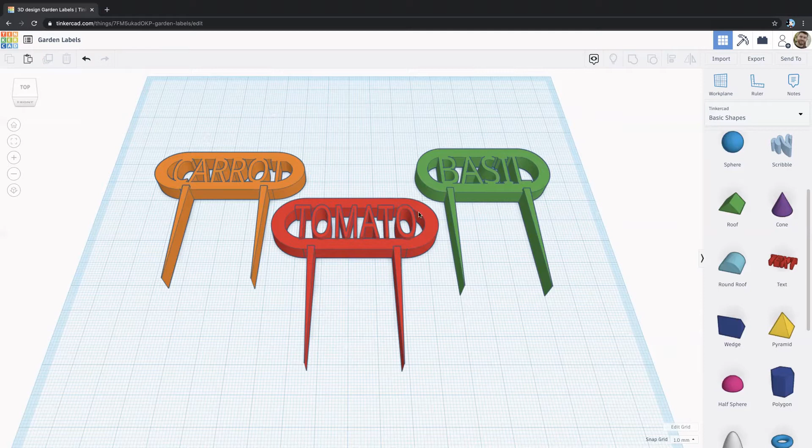To get started, we're first going to make this ring shape, which consists of two curved end pieces connected by two rod shapes. I'm going to walk you through step by step on how to make these, and when we're done, I'll show you two more very basic garden label designs you can make if this was too advanced. Feel free to pause this video and go at your own pace, but I'm just going to go step by step through my process.

Okay, so I'm going to clear my workspace to get started.

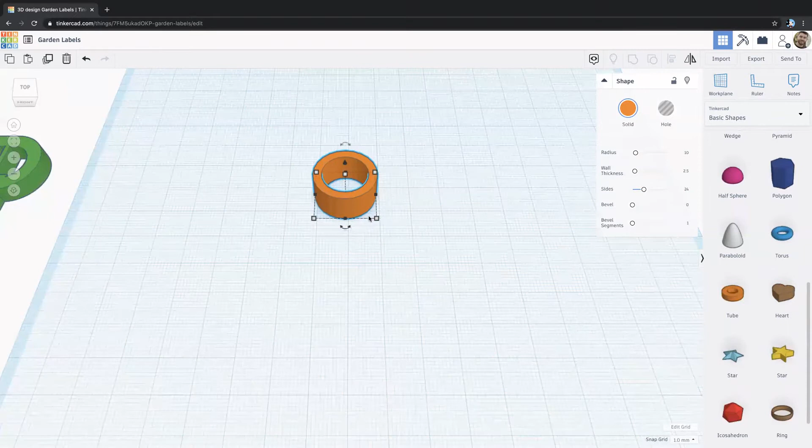We're going to start by going under basic shapes on the right hand side, scroll down and find the tube shape, and drag it into the work plane. Now I'm going to make this a little bit bigger by clicking one of the white boxes in the corners, and if I hold down the Shift key, it will keep the same dimensions, so it'll stay a circle.

I'm going to make it a little bit bigger. Let's say I'm going to make it 35 by 35.

I want to make the wall, which is how thick the circle is, a little bit thicker. I'll go to wall thickness on the right and set that to 4, see what that looks like. All right, that's a little too thick. Let's move it down to 3.5. That looks pretty good. Maybe 3. All right, perfect.

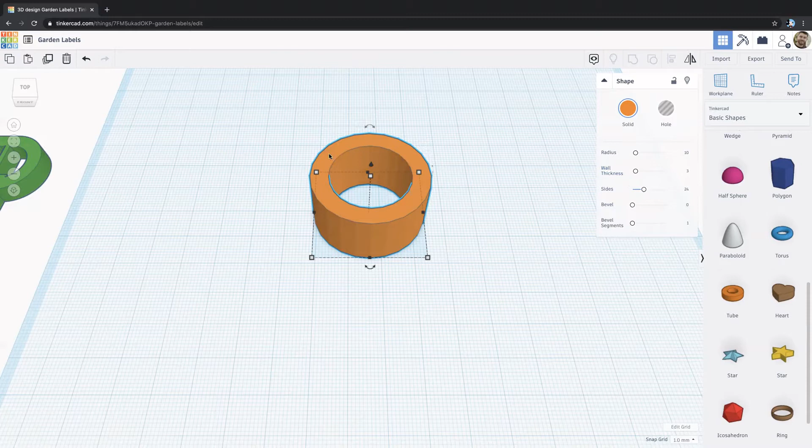Now the side slider will be how smooth the ring is. If I zoom in, you can see the circle is composed of a bunch of different flat shapes. If I increase the sides, you can see my circle gets a little smoother. So I'm going to increase that to 50 sides so it looks a bit smoother.

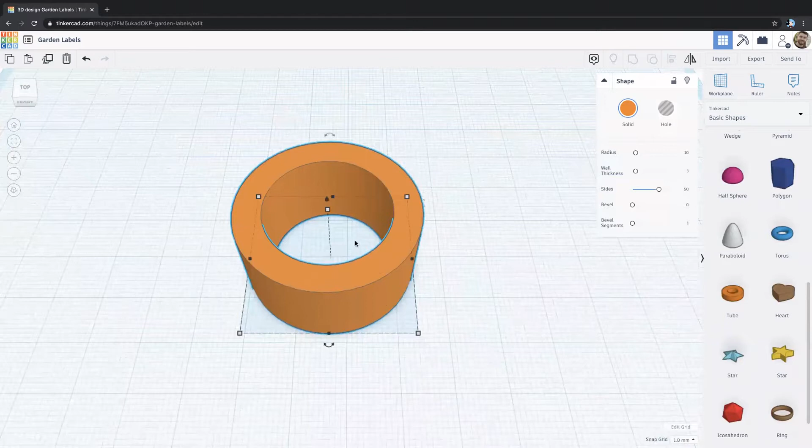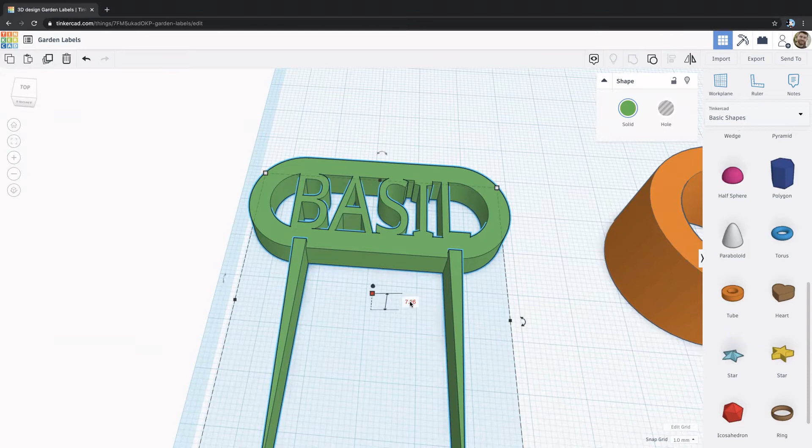Now I want to set the height of my label to be a little bit smaller so it prints and won't be so bulky. If I click on this object, I can find out the height by clicking the white dot in the center. If I click that, I can see this one's about 7.26 millimeters high. So I'll make it a nice even 6 millimeters high.

I'm going to go to my orange object, click that center dot, and change that to 6. Perfect, 6 millimeters.

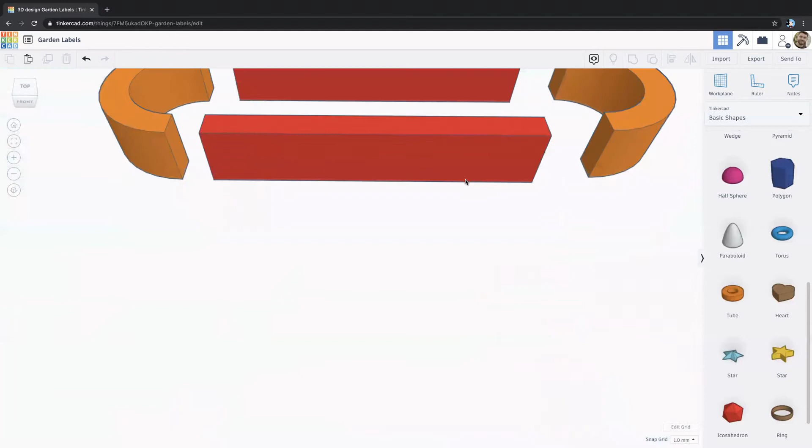So I'm going to take this one tube object and slice it in half. That way I'll have my two corners here and here, and I'll know they are the same dimensions because I'm taking them from the same circle object. So how do I do that? Well, we're going to use a hole to cut this perfectly in half.

I'll click this again—you know the dimensions because I showed them before, but if you forget, you can highlight over the corners and it'll tell you the exact dimensions. I set it to 35 by 35, but I'm going to make it an even number so it'll be easier to cut in half. I'm going to click the corner, let's make it 36 by 36. I'll use the tab key to go to the other side, 36, hit enter. All right, perfect.

So if I want to cut this in half, I need to make a hole that is half of 36 wide, so 18 wide. I'm going to drag a regular box icon from the basic shapes on the right, and set it to 18 millimeters in width. The height shouldn't really matter as long as it's taller than this circle, so you can just eyeball it.

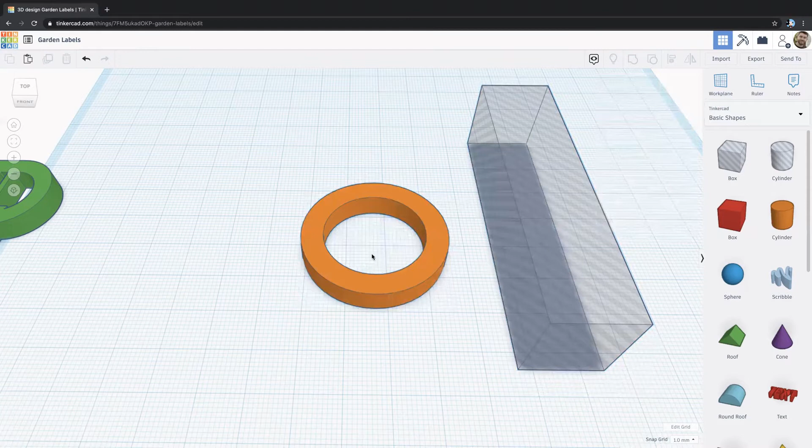Now, because the width is half of the circle, I need to align them so the side of the hole is lined up with the side of the circle. So I'm going to select both the circle and the hole. You can click one, hold shift and click a second to select them both, or you can just drag a box around them both to select them.

I'm going to click the align tool on the top right. You can also access it by hitting the L key, but if you don't want to do that, it's right up on the top right. It looks like two boxes with a vertical line. I'm going to click that, and all my little dots change to these black circles.

So it's asking me how I want them aligned. I'm going to click this circle here at the bottom right, and that's going to align them on this right side of their objects. Now you can see just with the naked eye that this looks like it's been cut right in half, and we know it's been cut in half because this box is half the width of the circle.

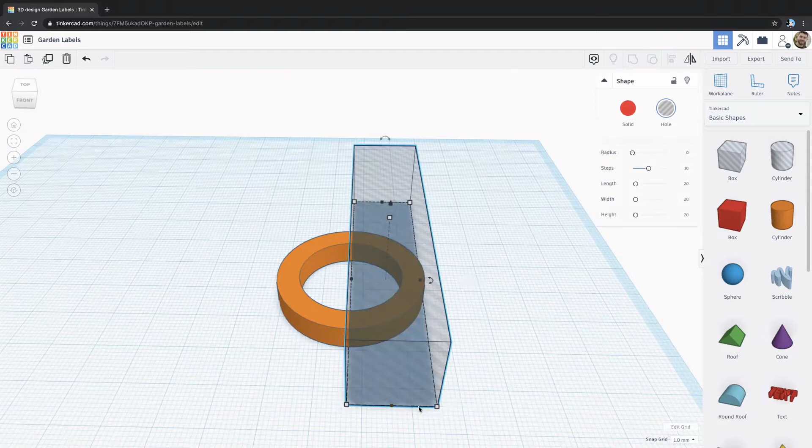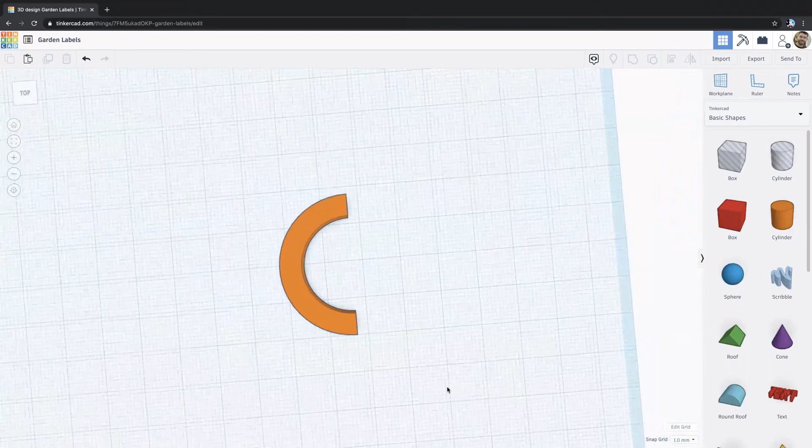Now what I'm going to do is group the hole with the solid object to cut it in half. So again, I'm going to select them both and click group on the top right. When I group a hole with a solid, it cuts the hole out of the solid, so now we have a semicircle right here. Perfect, so that's one end.

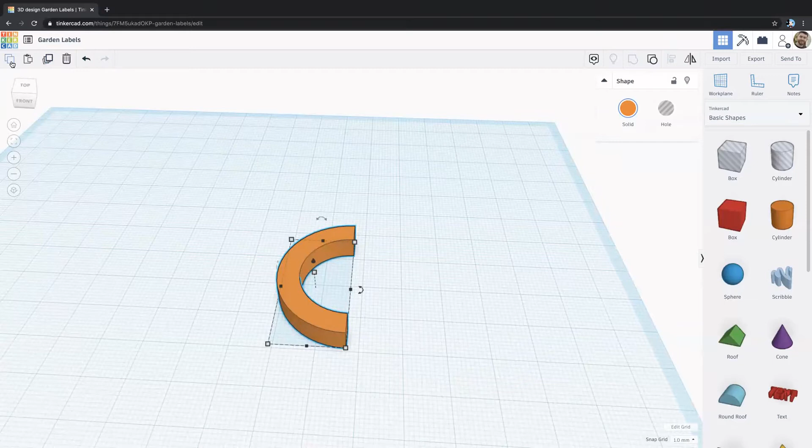Now, instead of going through all of that again, I'm just going to take this and copy it. I'm going to click the object, then do Command C and Command V, or Control C, Control V if you're using a PC, to copy and paste. If you don't want to use those shortcuts, you can use the icons on the top left, which do the same thing. So I'm going to select my object - the two stacked boxes are copy, and the clipboard is paste.

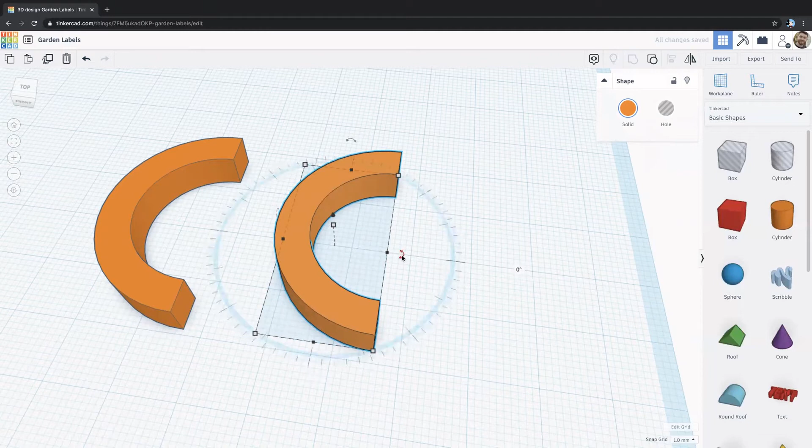Does the same thing. Now I just need to rotate this. You can see there's a few arrow icons - just make sure you're clicking the right one so you're rotating it on the right axis. I'm going to click this one, and you can either click it and rotate it like that, or you can do it the same way we did before - enter it manually, enter 180 degrees to flip it around.

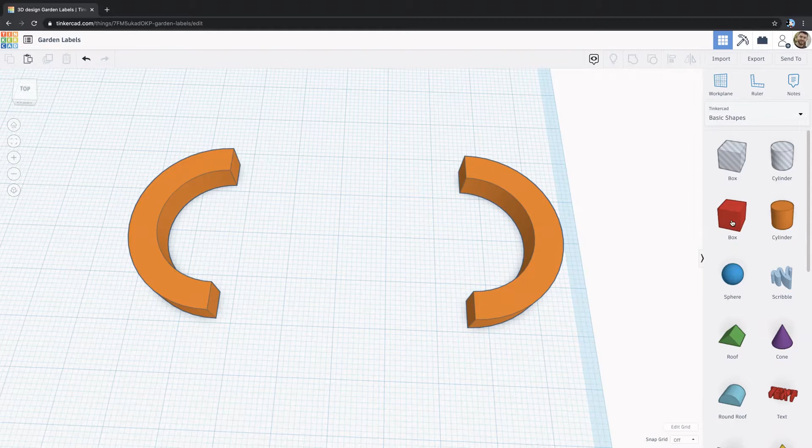All right, so now that we've created our two round edges, we're going to create the top and bottom little struts that will connect the two curved endpoints. We're going to do that by dragging out a box, and make sure we set the box's height to the same as the ends, which you can click that little box in the middle, and we set ours earlier to 6 millimeters. So we're going to change this to 6.

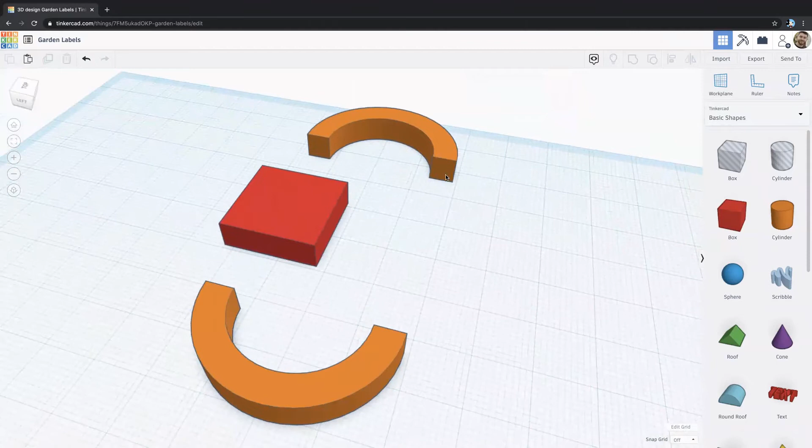Now, we don't know what the thickness of the endpoint is here. It won't be the same as the wall thickness that we set earlier. So what we're going to have to do is eyeball it.

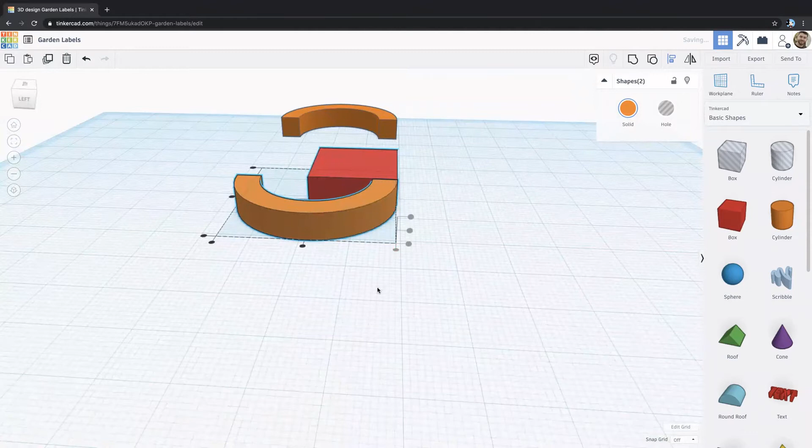What I'm going to do is select an end and the box, and align them. So click again the L key or the align tool on the top right. I'm going to make sure that they're perfectly flush, so I'm going to align them. And now I'm going to zoom in as close as I can, and I'm just going to have to eyeball it and get it as close as I can.

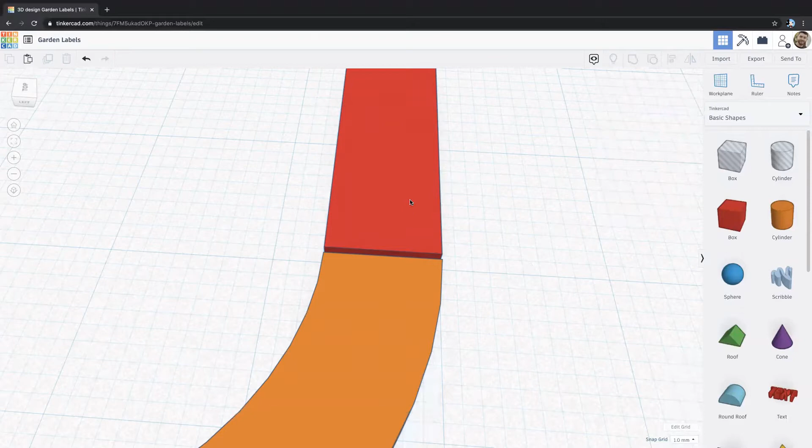So if I bring in the corner here, that looks pretty good. Now, if you're not getting as much control as I am, it's probably because your snap grid at the bottom might be set to 1 millimeter or more. The snap grid determines the increments with which you can change object sizes. You can see here it's kind of like snapping to these fixed points - that's the snap. It's snapping for 1 millimeter right now.

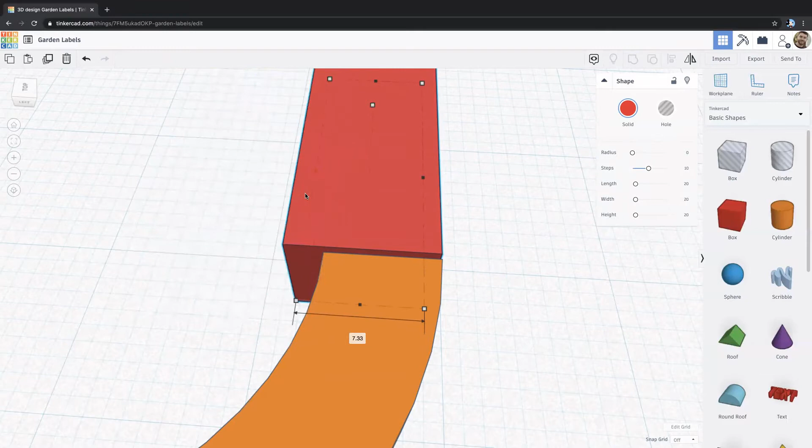So if I change the snap to lower or just turn it off entirely, now you can see it's much more fluid motion, so I have more control over the size of the object. I'm going to turn snap grid off and just get an approximation.

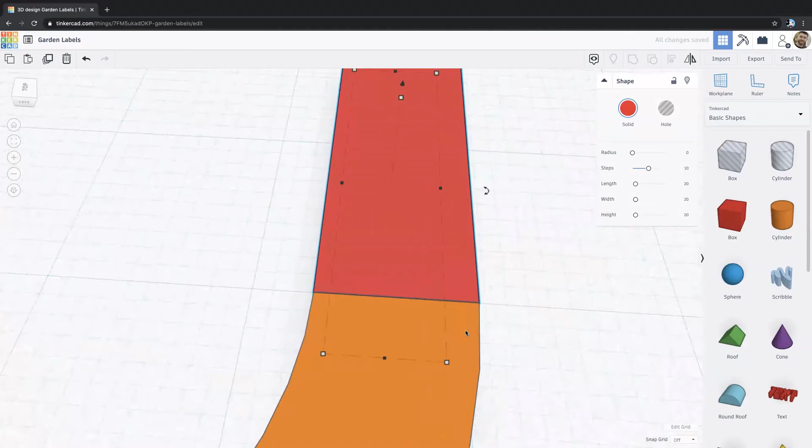You can use the arrow keys on your keyboard to move an object around as well. So I'm just going to tap down with my arrow key until they're just touching, and I can tell that that is pretty good. So I'm happy with the way that looks. I'm going to zoom out a little bit more - that looks good to me.

Okay, so now that we have that in place, I'm just going to make it a little bit wider. Let's see, that looks pretty good. And we can adjust that later on - I'll show you how to do that. But this looks pretty good for now.

So I'm going to make sure that all three of these pieces are aligned. I'm going to select all three of them, click the Align tool again, and align them on this edge.

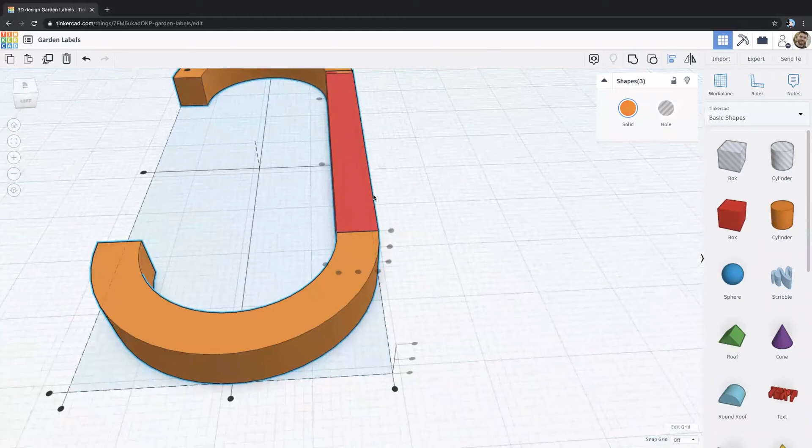So that just moved this piece here to be lined up with the other two, so now I know everything's going to be flush on this side, which is perfect. But before I group them, I'm going to make a copy of this red piece, and just put it aside for now.

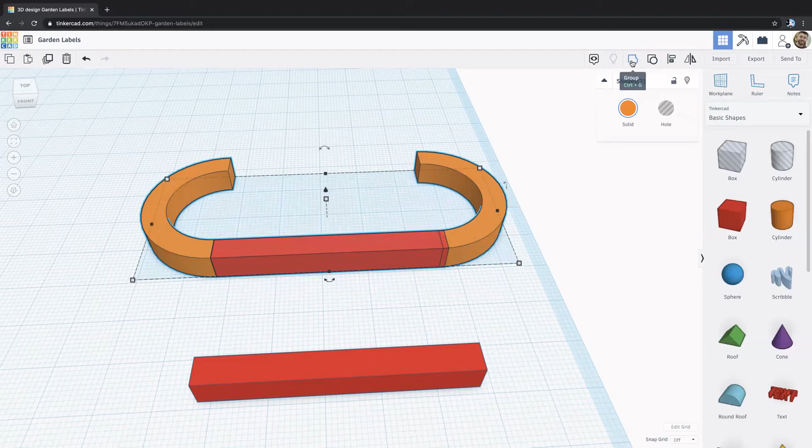Now I'm going to group these three pieces. I'll draw a box around those three, click group, and now they are all one piece. So now I can just sit this right in there. I'm going to group everything again.

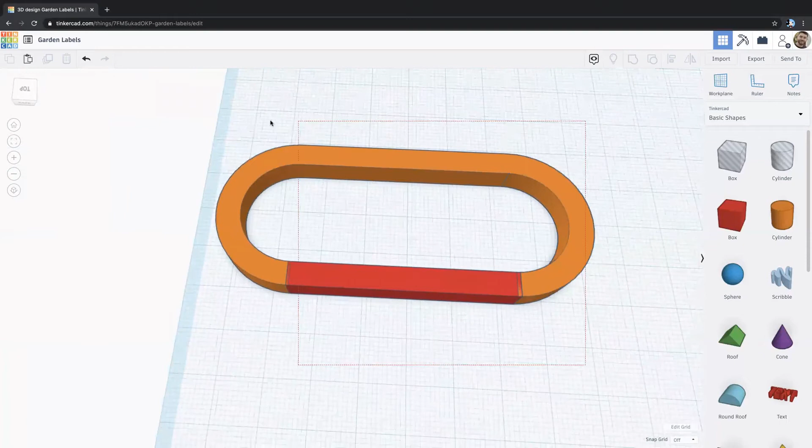I'm going to align it, this time on this side. And now we can see our red piece is now flush with our oval. Now I'm going to group everything. Perfect, there we go. Now we have the little border for our label.

So next thing we're going to do is drag the text shape out. Text you can find under basic shapes. Again, it says text, just drag it out, and flip around so you can read it.

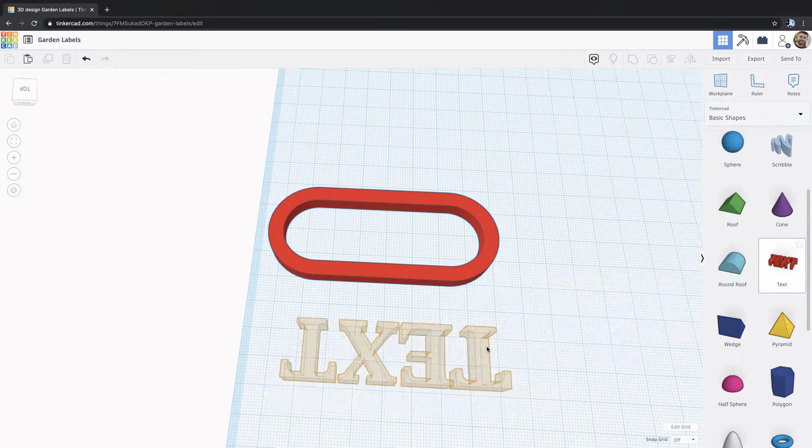So in order to change this text, you're going to go under the shape options on the right. And I'll make it a different color so we can tell that we're working with a different shape.

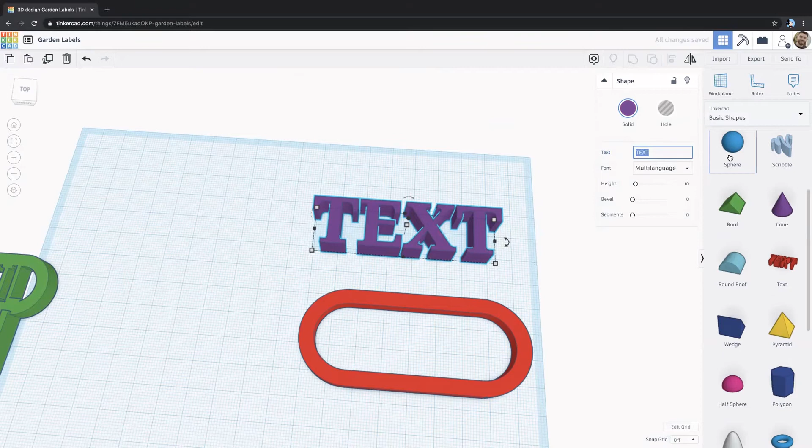Okay, and now under text, you can change what's written here to change the text that's on your screen. So I'm going to write, we'll do basil again. And it's case sensitive, so I think capitals looks better, so I'm going to keep it at capitals.

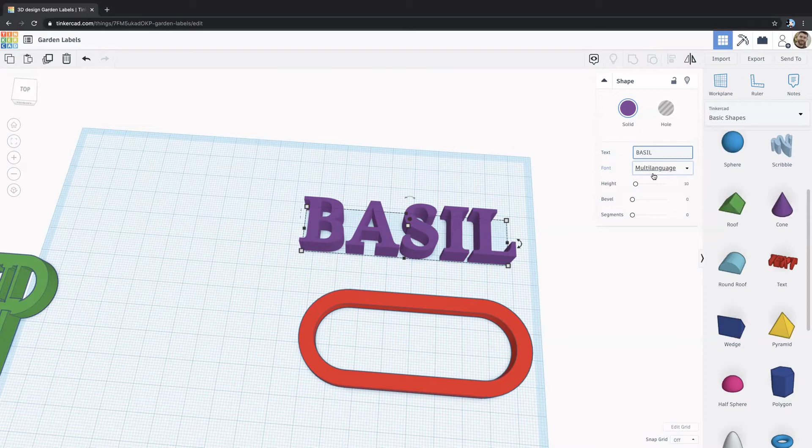Now one thing you want to keep in mind, when we send this to the 3D printer, the printer only has so much detail. So if you do a serif font - one that has these little lips and edges and curves and things at the ends, like these little flares on the letters - the 3D printer might not pick up all that detail when it goes to print.

So what I'm going to do is change the font to either a sans or the sans mono font. Basically what that's going to do is just simplify the letters, and it'll make it clearer when we go to print.

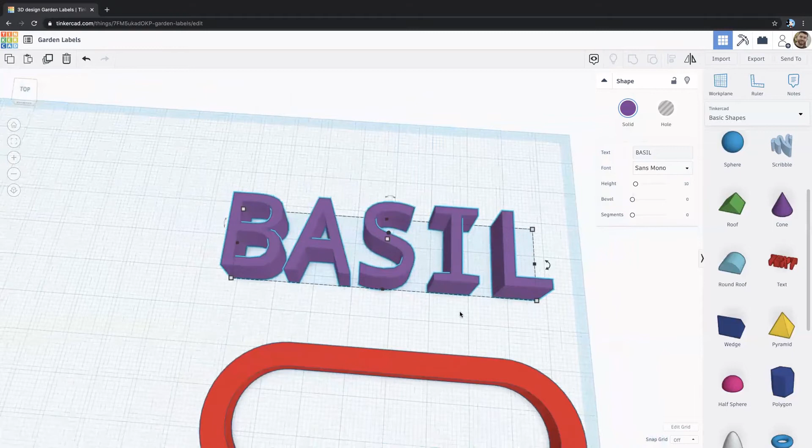All right, so before we add this text to our label, we're going to do two things. One, we're going to make a copy of this kind of dog tag looking oval shape and just put it aside, and I'll explain why in a second.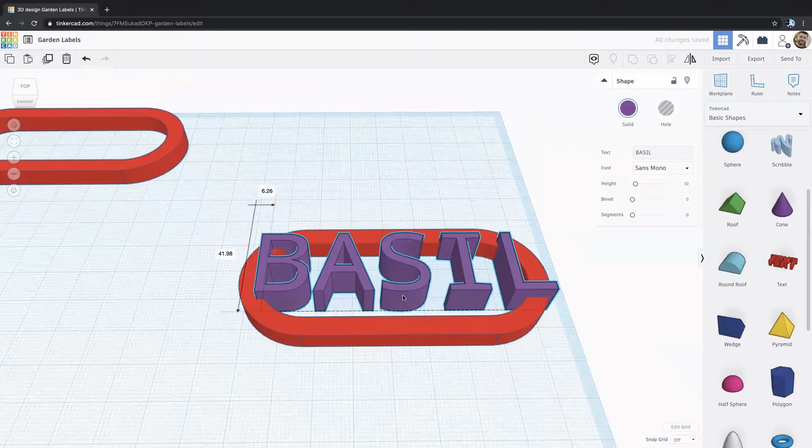Second thing we're going to do is make sure that this basil text fits inside of this and is the same height. So again, the height of this label right here is 6 millimeters, so I'm going to set the basil to be 6, same way I do for the other objects.

Now you can see it's a little overlapped now. That's okay, so we can either make basil larger, or we can adjust the size of the oval. So I'm going to adjust the oval.

So again, when we go to print, we need to consider what this object is going to look like when it's printed. Now we want the letters to be touching the oval object so they're not floating in space. Because when we go to print...

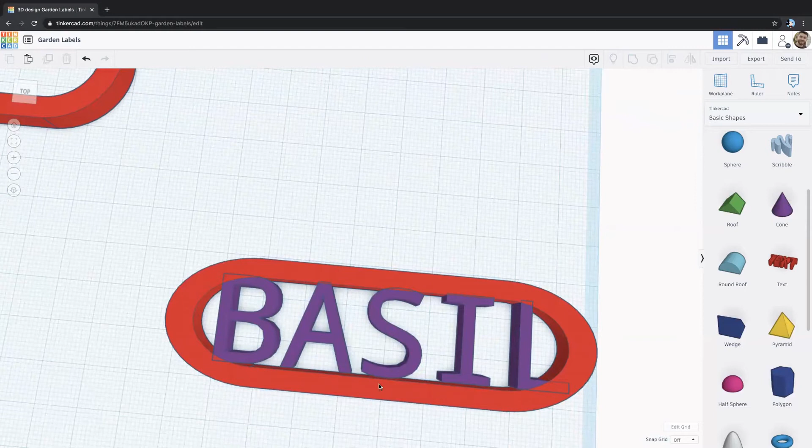If the letters are not connected to this oval on the outside, they're going to fall right off of the object when we print. So we want to make sure that the letters of basil are touching the top and the bottom of this oval shape.

So this is going to be different depending on which word you write in your label, but basically you're just going to want to get this to look the way you like it. So I'm going to just play around with basil, move the letters a little closer. I think that looks pretty good.

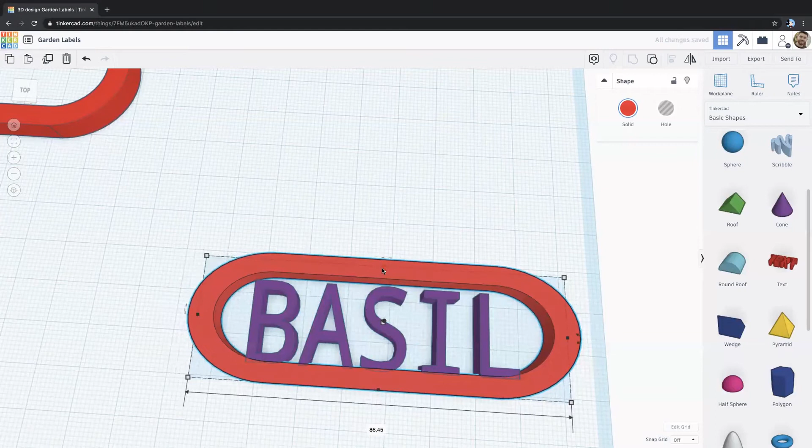And then once I have that in place, I can adjust my label here. And again, you want to make sure that the letters are touching the oval on both the top and the bottom, or at least the top or the bottom, if not both.

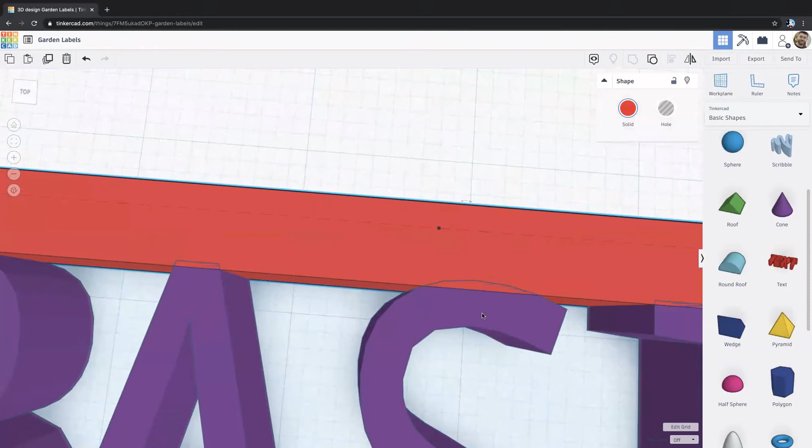And you can tell by zooming in - if you see a little bit of overlap there, that means they're connected. This is a better angle right here. So if you see that right there where the S is overlapping, you know when you go to print it will print as one object.

Do it a little bit more just to make sure that they're connected. All right, perfect. All right, so if that looks good, that's the way I want it printed.

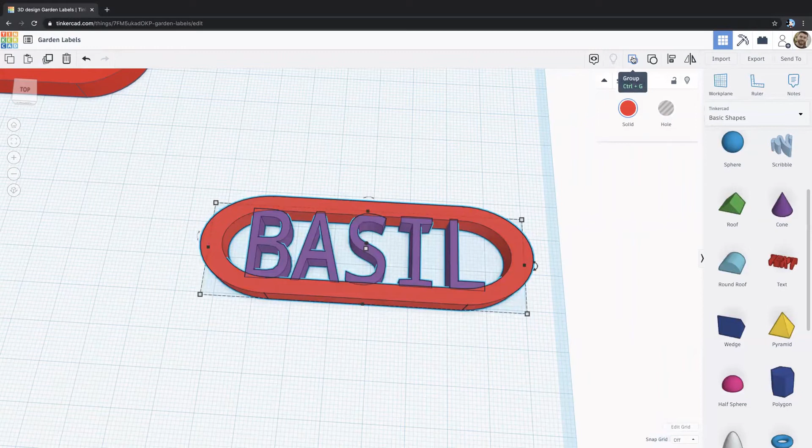What I'm going to do is, again, select them both, so I can draw a box around them, and I will click Group on the top right. So there we go, we have our basil label finished.

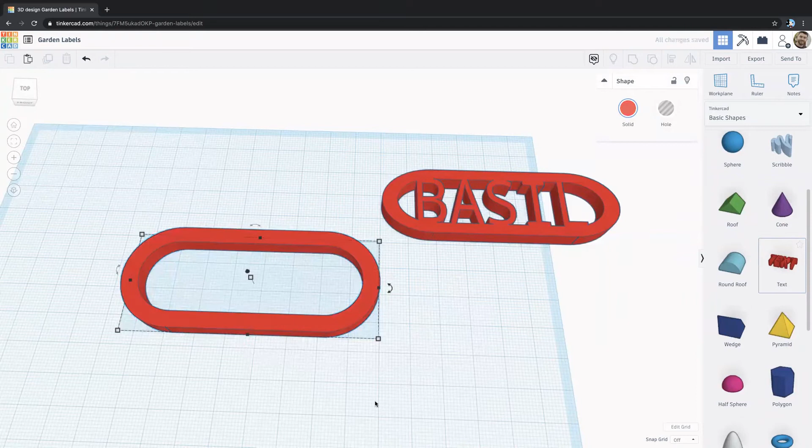Now, the reason I made this duplicate of the oval is because now I can use this duplicate to make more labels without having to go through all the steps of rebuilding this little border. So what I mean by that is I have my border here, I can just drag out the text again and change that text to something else.

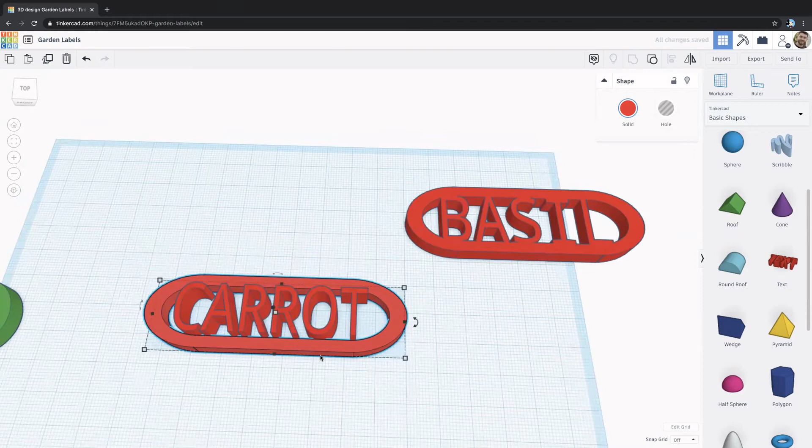And now I can use that to make a new label. Before I group these together, I want to make another copy of that label and put it aside so I can do this again and again without having to go through all the steps of building that border again. So I take my text, set it to the same height as the oval, and position everything the way I like it.

It might be helpful to use the arrow keys when you're doing this. Just make sure everything is overlapping. All right, that looks pretty good. So I'm just going to select everything, hit Group, and there we go. Now it is all one object.

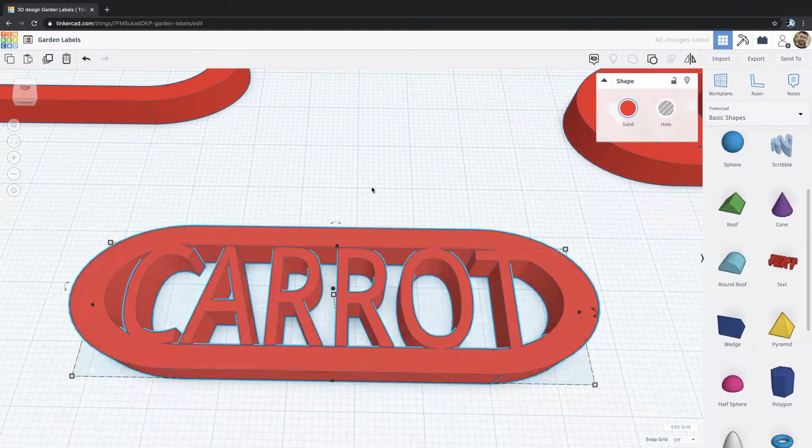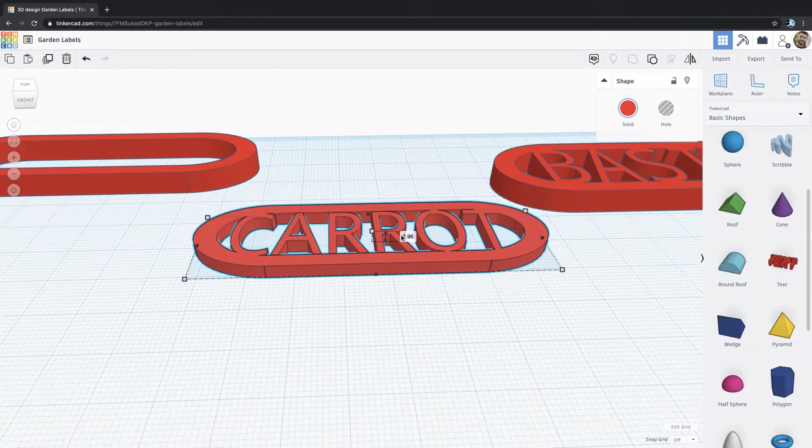And I can send that to the printer and it'll all print as one nice piece. Now, once you have it all grouped together as one piece, you can adjust the height at that point too. So if you get to this point and you think it's a little thick or too thin, you can adjust the height that way as well. So I can set this to 3 millimeters if I like it like that.

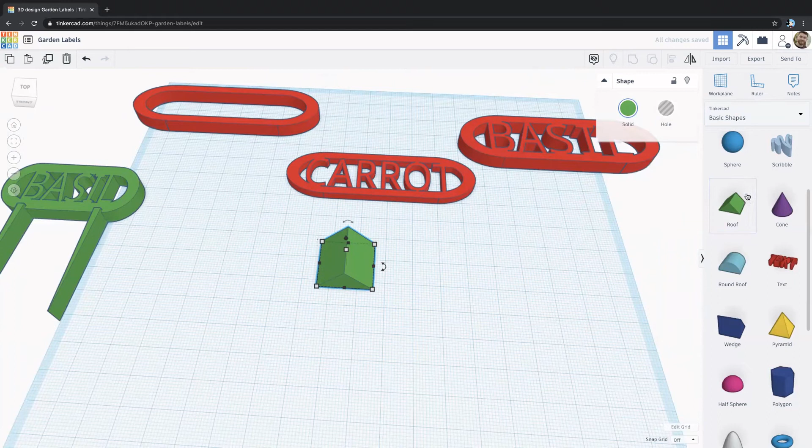Now we just have to add our little spike so it'll stick in the ground. You can do that a bunch of different ways. On these examples I started with, all I did was use the roof basic shape, the green roof shape on the right hand side under basic shapes, and rotated it forward, shrunk it down a bit, and stretched it way out to make it thin.

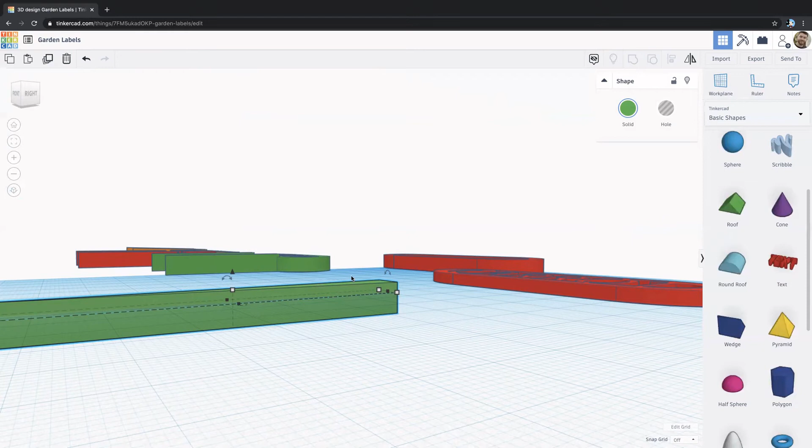That's basically it. Now you'll notice that this spike is underneath the work plane. When I go to print, it's not going to print anything under the work plane, so I want to make sure - it might actually confuse the 3D printer. So we want to make sure everything is flush with the work plane. You can do that by raising and lowering the object with this black arrow that's right above the dot that tells you how tall something is.

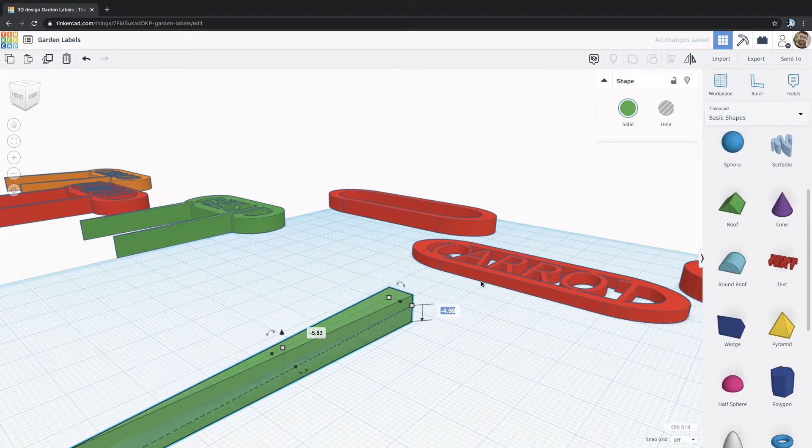You can raise it and lower it with that black cone. As I'm clicking and dragging it to raise or lower it, this number indicates how high or beneath the work plane it is. If you see a negative number here, that means it's underneath the work plane. So I want to make sure this is 0, which means it's totally flush with the bottom here.

Now this carrot label I just made, the height was 3 millimeters, so I'm going to make my spike 3 millimeters. And I'll make it a little bit thinner. Perfect. Now I can just line it up however I like.

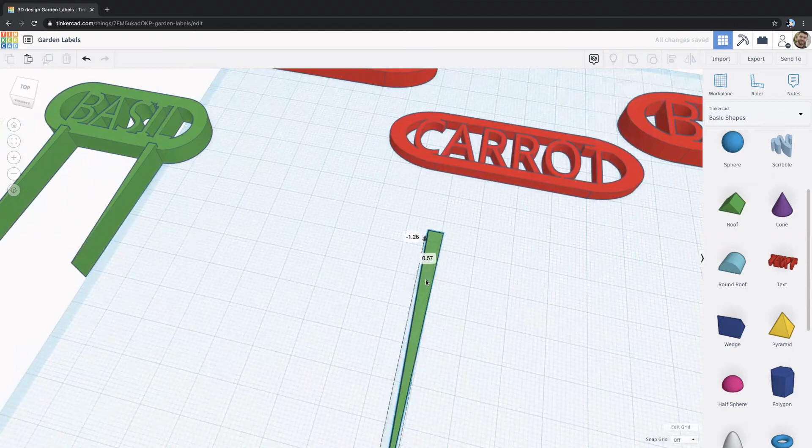Make a copy of it, put one on that side, and you've got to make sure to group everything together again. So I'm going to draw a box around everything, click Group, and there we go.

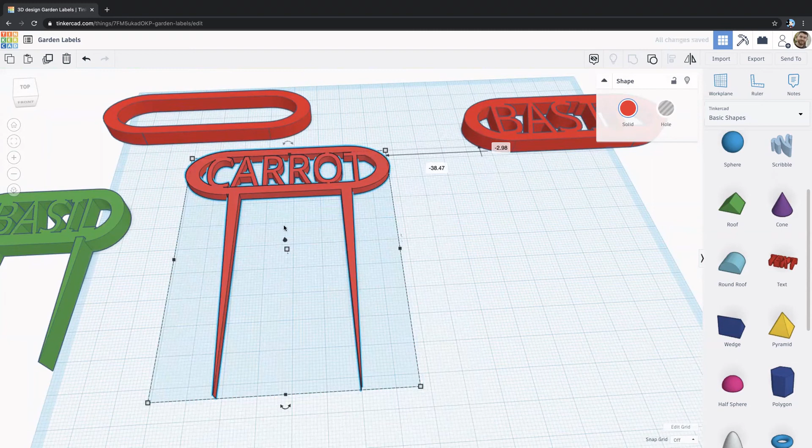That's one label done. Now I made 2 stakes, and that's just a personal preference. You can do the same thing with one, and you don't have to use the roof shape either. You can do just a straight line if that's easier for you, or a cylinder. You can do basically anything, as long as it's thin, it will stick in the earth.

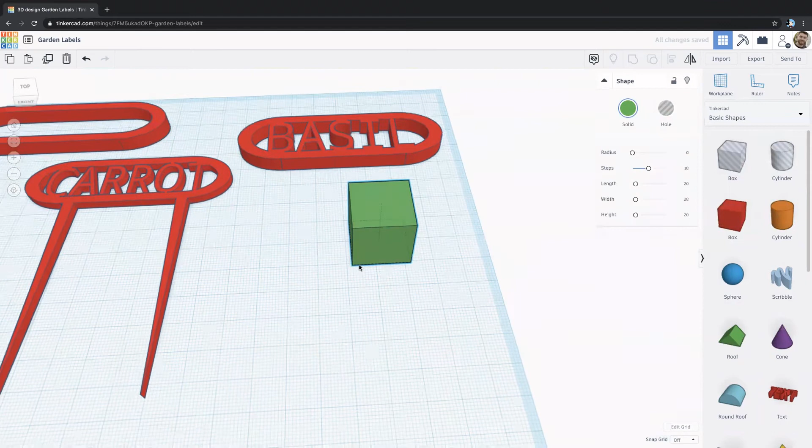So I'll do it with a box this time. I'll make it a different color so we can tell what we're doing. All I'm going to do is make it really, really thin, really, really long. And I need to make sure the height matches the label. This one is 6 millimeters high, so I'm going to make this 6 millimeters high too.

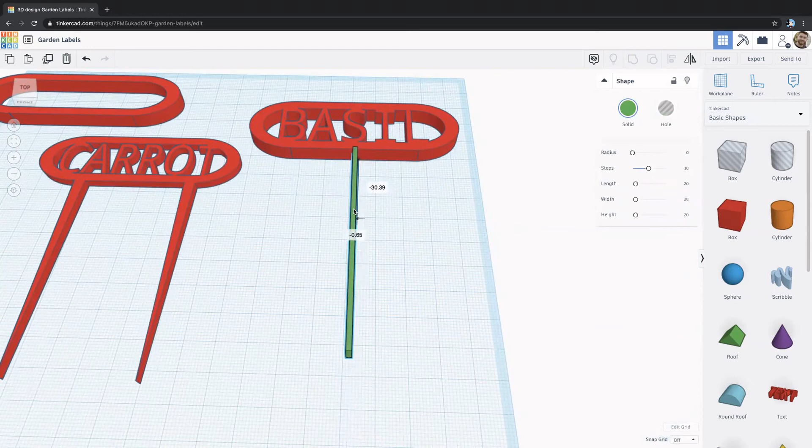And if I'm only going to use one spike, I want to make sure it's in the center, so I'm going to put it right there. Drag a box around it, click Group, and there we go.

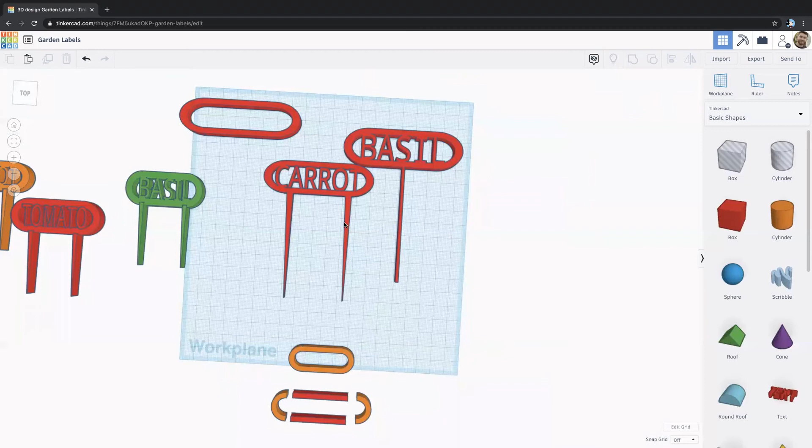So those are 2 different ways you can make the stakes of your labels. And you can make the stakes as long as you want to. These are pretty short, so whatever you're adjusting, just make sure your spike is the length you want before you attach it. Otherwise, when you go to make it longer or shorter, it's going to stretch out the words too.

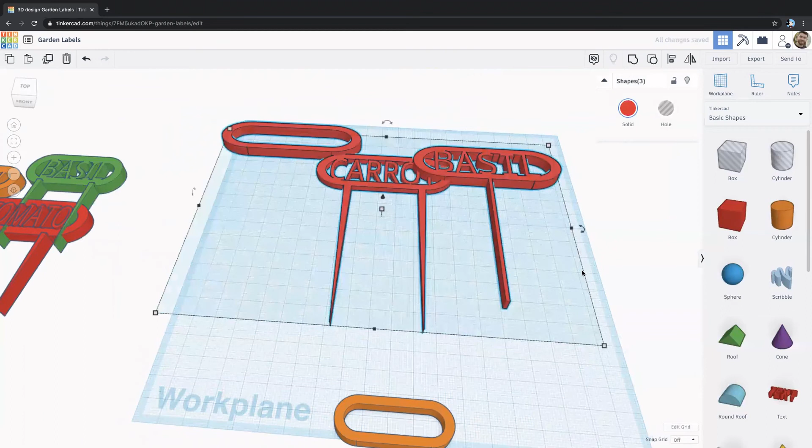Okay, so that is basically all you need to know to make the labels that I showed you in the beginning of the class. Now I'm going to show you a much simpler way of making a label if all of this was too much for you or you're just starting out. So I'm going to clear my workspace, move everything aside, and we're going to start over. All right, so now this time I'm going to start with my text.

And again, I'm going to change it to sans, and we'll call this one eggplant.

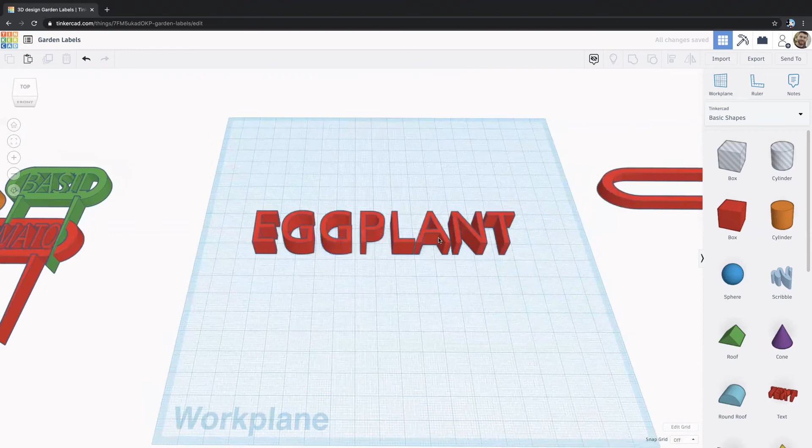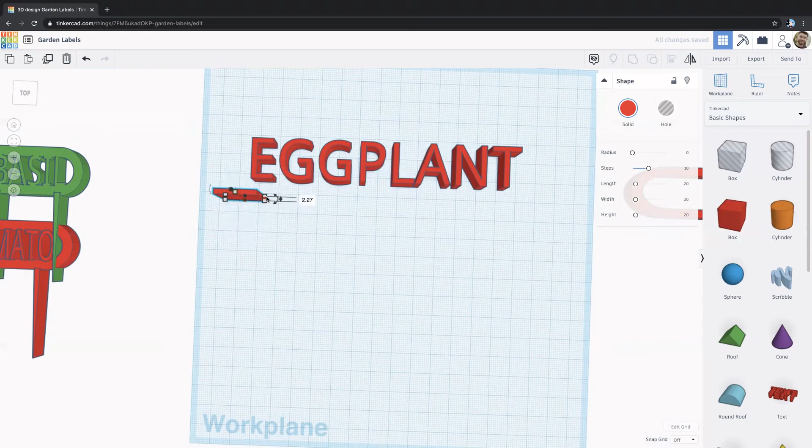Okay, so there are two different ways you can do this. You can have the words vertical or horizontal. The first one I'll show you is vertical. So I'm going to drag a box out and basically underscore eggplant here, making a really thin and long box, just like I did for the stake.

Let me change the color so you can tell what we're working with. I want it to be overlapping, and the reason we want it overlapping is so it connects all of these objects. Otherwise, they're going to print and be floating in space. We want everything to be one solid object when we print.

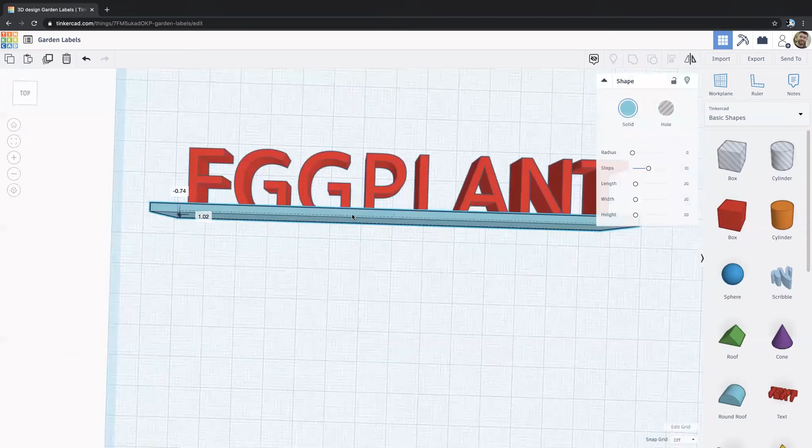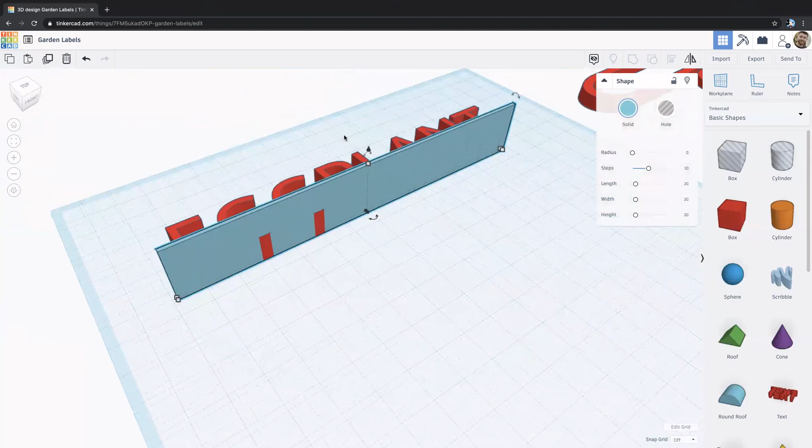So let's make this a little thinner. The reason I'm making this line is, again, to connect all of the letters, but also we need something to use as a platform to stick into the ground. I'll show you what I mean by that in a second. So I'm going to set this to the same height as eggplant, which in this case is 10 millimeters.

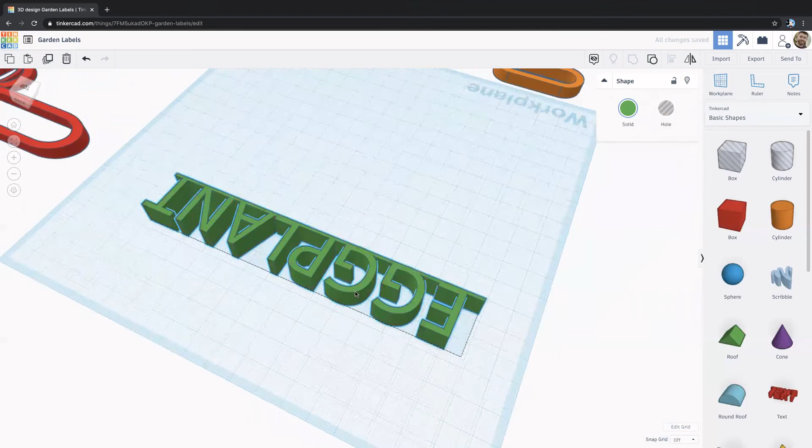Change this to 10. Perfect. I'm going to draw a box around everything and click group. Now, instead of having this oval shape around eggplant, it just says eggplant with a platform underneath it. And now I can add my little spike underneath it.

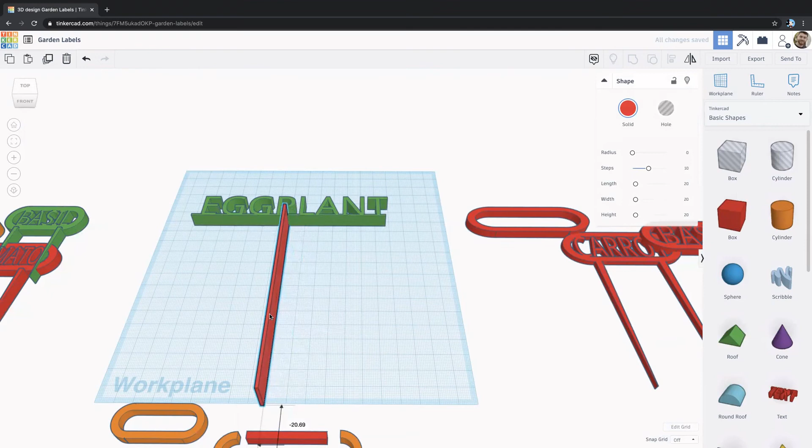Set that to 10 millimeters as well. And if you want to make sure that it's perfectly centered with eggplant, just select a box around both, then click the align tool and align by the center dot. That will perfectly align everything. Now I can group it.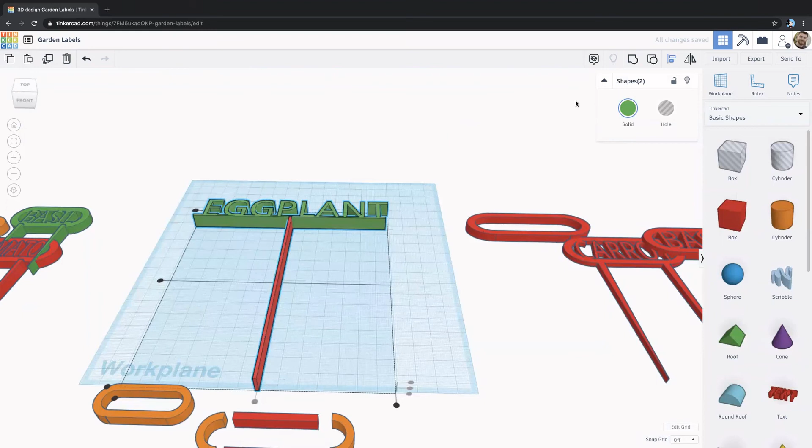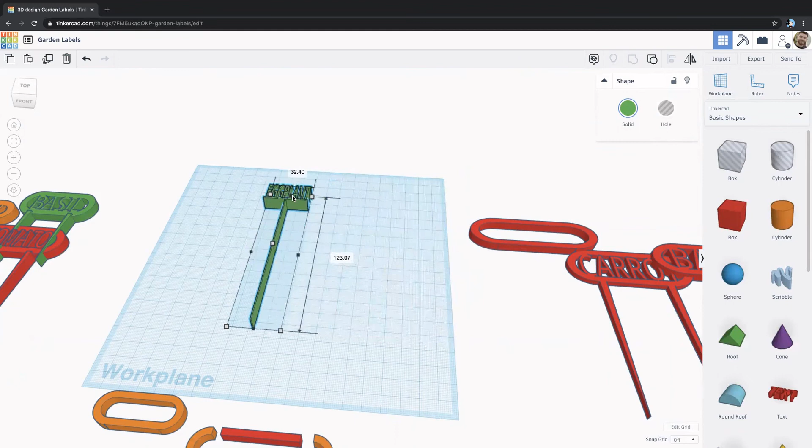And there we go. So that's a much easier way of making your label, your garden label. I don't think it looks quite as fancy as the one we used before, but it's totally functional and works great, and it'll take much less time to print as well. And then once we have everything grouped, you can adjust all the sizes at this point. So if you want it nice, thin and long and narrow, that works too, like that.

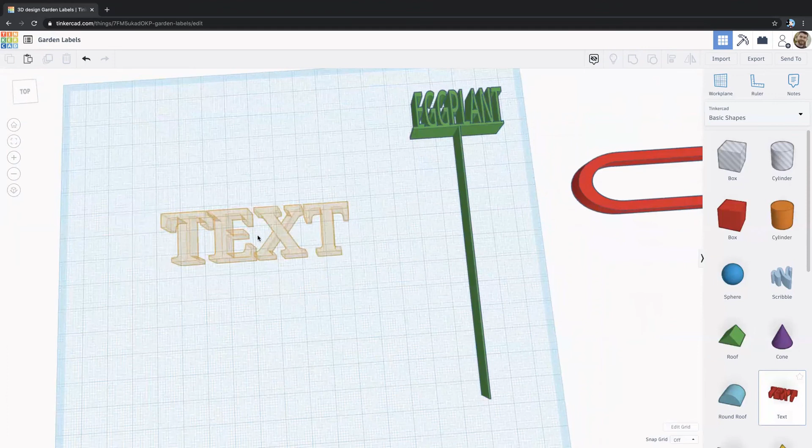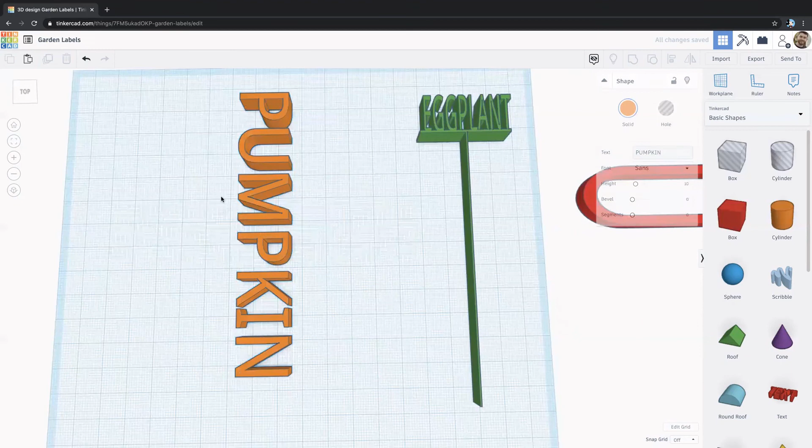All right, I'm going to show you one other quick garden label. It's going to be similar to this one, but in this case, the letters are going to be vertical. So I'm going to start this time again with the text, and I'm going to change it to sans. Now this time I'm going to rotate the text. I'm going to select the text, click the arrow, and rotate it 90 degrees. And I'm going to shrink it a little bit just so we have enough workspace.

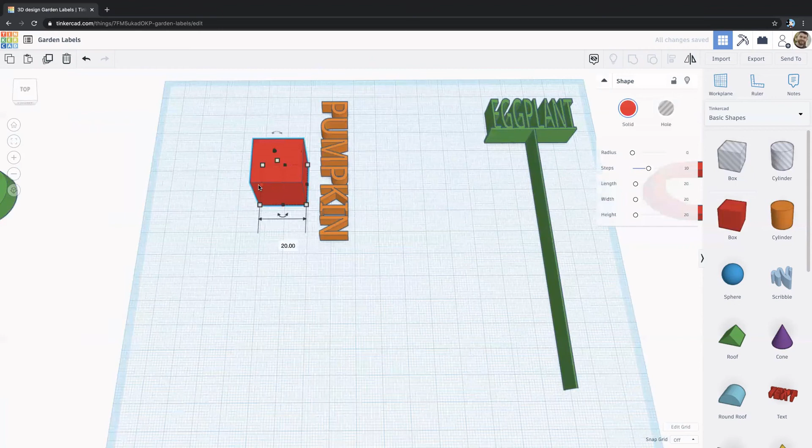Now I'm just going to connect the word pumpkin right with the stake and eliminate that underscore. I'll do that with the box again because it's a little bit easier. So again, I'm just going to make a really thin, really long rectangle. I'll zoom in a little bit so you can see better.

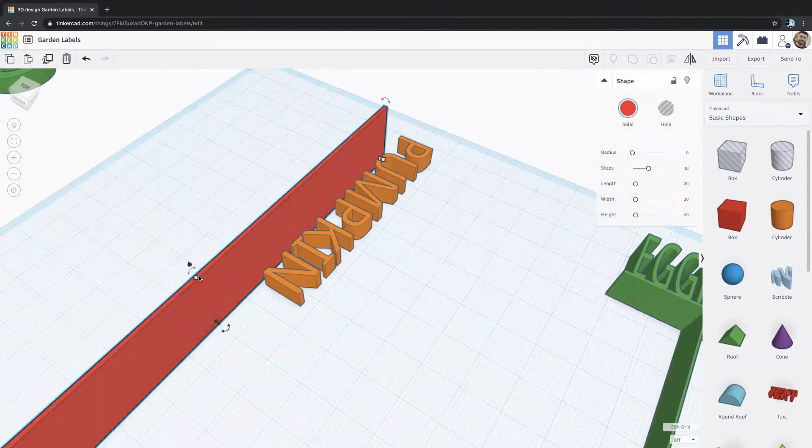Now I need to make it the same height as pumpkin. So pumpkin now is 5.74, so I'm going to make this 5.74 millimeters high. Now I want to align them so this stake aligns with the top of the P and the bottom of all of the letters. So I'm going to draw a box around both of them and click the Align tool.

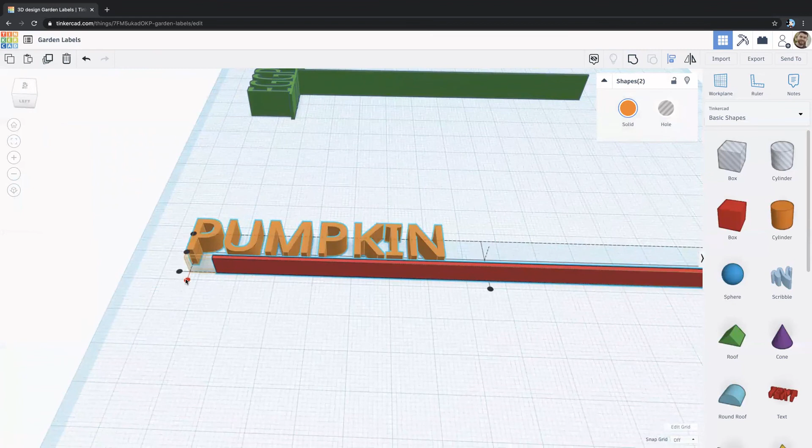Now I want them to align to the left of the P, right? So I'm going to click this one. Perfect. And now I'm going to use the arrow keys to just nudge this red line up until it's touching all of the letters. I'm just going to keep hitting my arrow key until it's overlapping all of the letters. That looks good, but I'll do one more just to be safe.

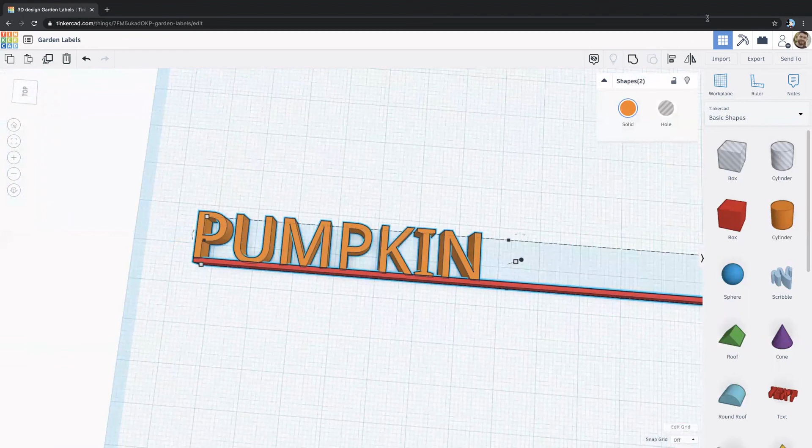Perfect. If I zoom in a little bit more, you should see that red line is overlapping all of the letters. Now I'm going to draw a box around both of them again and group them together. And there we go. So now I have a vertical garden label. It's just as functional as any of the other ones we made, but I did it in 3 steps instead of making this oval shape.

And again, because it has less objects in its design, it will print faster, and therefore it'll save you money when you go to print. So that's another consideration as well.

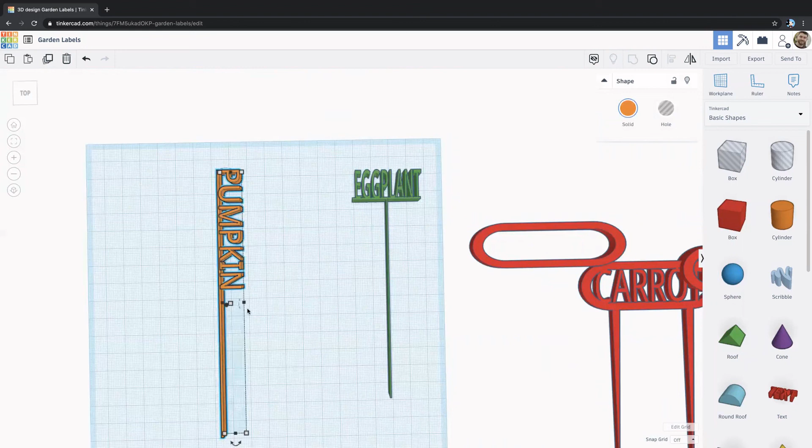So these are 3 designs that you can use to print your own garden labels. Again, you can print through Savo Library by going to savolibrary.org, and under the Library Services tab, go to 3D Printing.